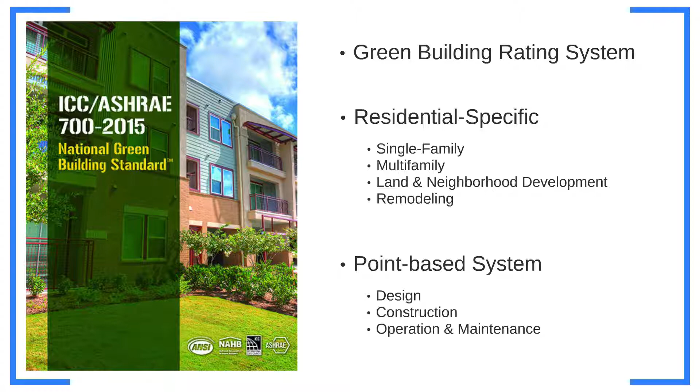The standard is a point-based system where a project can attain points and certification depending on the sustainable and green practices included in its design and construction, as well as planned for its operation and maintenance. Remodeling of existing homes and functional areas will not be reviewed in this presentation. Please reference the presentation titled Remodeling to the Standard for more information about certifying a remodeling project.

Site and neighborhood development projects can qualify for 4 increasing levels of certification, ranging from 1 to 4 stars, by earning the required number of points for each level. Similarly, single-family and multifamily homes can also earn 4 levels of certification, ranging from bronze to emerald.

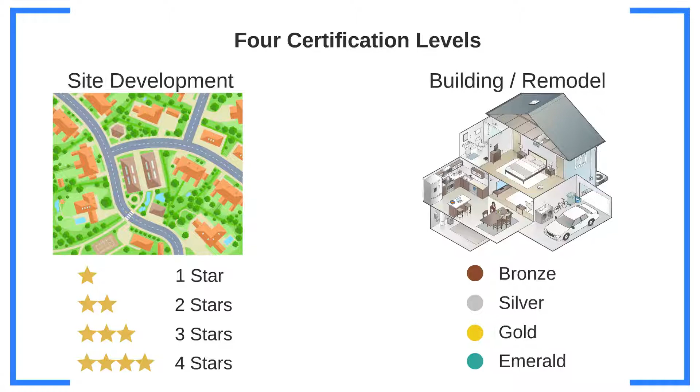Given the growth in green home building, it is critical that any residential green building standard utilized by builders across the country remains up to date with the latest technology, practices, and codes. The 2015 version of the standard is its 3rd iteration and builds upon the previous 2012 and 2008 editions. Each edition of the standard was developed by a consensus committee of industry experts, facilitated by the International Code Council and the National Association of Home Builders.

With this newest edition of the standard, the American Society of Heating, Refrigerating, and Air Conditioning Engineers, or ASHRAE, has joined in the development process, with a new formal citation becoming ICC ASHRAE 700 2015 National Green Building Standard. The standard carries ANSI approval as an American national standard, maintaining a consensus-based development and ensuring a balanced and well-rounded residential green building program.

The consensus committee that developed the 2015 version of the standard was comprised of 42 individuals representing a variety of government agencies, municipalities, industry stakeholders, and nonprofit organizations, including Habitat for Humanity International, the U.S. Department of Energy, the U.S. Department of Housing and Urban Development, and the American Institute of Architects.

The remaining 6 categories listed, from lot design, preparation, and development to operation, maintenance, and building owner education, are all focused on single-family and multifamily buildings. All of these 6 categories must be addressed in order for a building to achieve any level of certification. In fact, a building must meet the minimum point requirements for every category in order to earn certification.

For example, if a project is seeking gold certification, it must achieve the minimum number of points required for each category. It must also achieve at least 100 additional points on top of that, which it can earn from any category in order to have the final point total needed for certification. If a project does not meet the minimum number of points needed in every category, it cannot earn that level of certification. This is true even if the project has earned more points than needed in some categories.

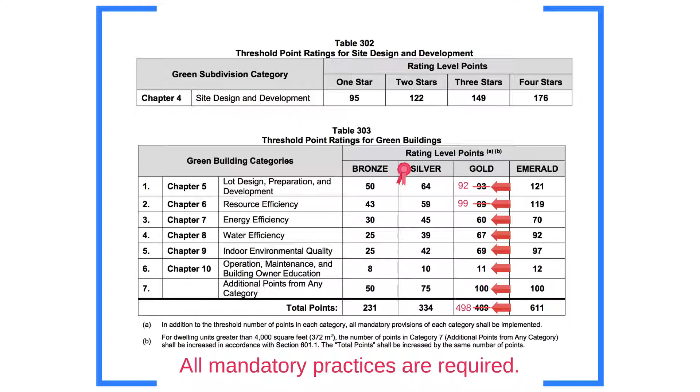This requirement makes the standard both a balanced and rigorous green building rating system and does not allow projects to earn certification if they do not address all aspects of green building. A project team must keep in mind that there are also a number of mandatory practices throughout the standard which do not earn any points. These must also be achieved for any project pursuing certification.

So let's take a quick look into each category. The Site Design and Development category, where a neighborhood can earn its own certification, focuses on minimizing the environmental impact of development, protecting and restoring natural features, and encouraging pedestrian activity in the area. Some of the practices available include clustering lots, buildings, and infrastructure, developing mixed-use areas, increasing density of residential units, and selecting high-priority sites, such as brownfields, greyfields, and infills.

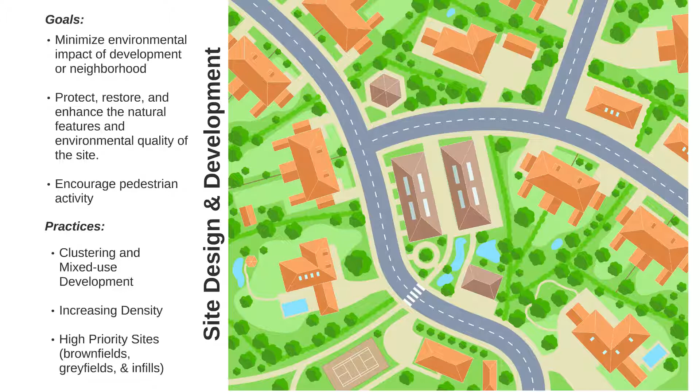Stormwater management practices are integral to the sustainability of a site. The standard recognizes and awards a number of stormwater management strategies, such as integrating increasing amounts of permeable surfacing into a community, which helps reduce runoff and increases opportunities for infiltration. Constructed wetlands and other natural innovative wastewater or stormwater treatment technologies are an excellent way to both manage and treat water on site, as well as earn points towards certification.

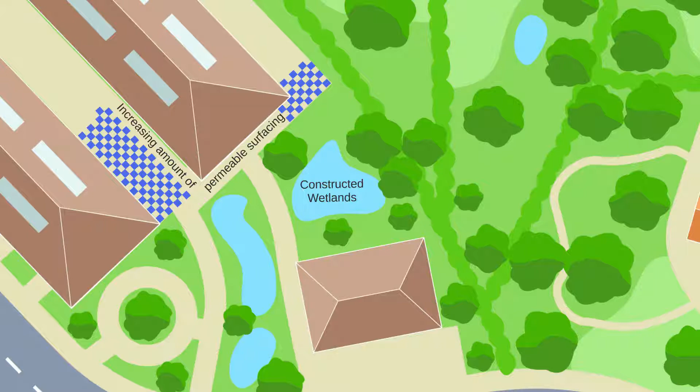Points can also be achieved if the stormwater management system is designed so that runoff rates, volumes, and durations are no greater than that of the pre-development, stable, and natural condition of the site. A hydrologic analysis is required for verification.

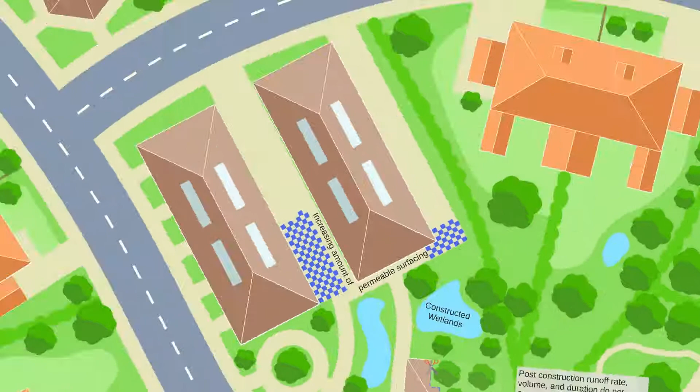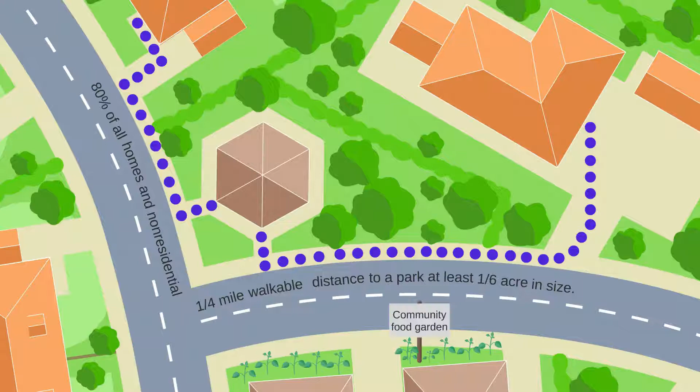The standard encourages increased community activity within the development as well. Points are available to neighborhoods if 80% of all homes and non-residential buildings are within 1/4 of a mile walking distance to a park or common area that is at least 1/6 of an acre in size. Projects can also earn points if a community food garden is established and open to all residents.

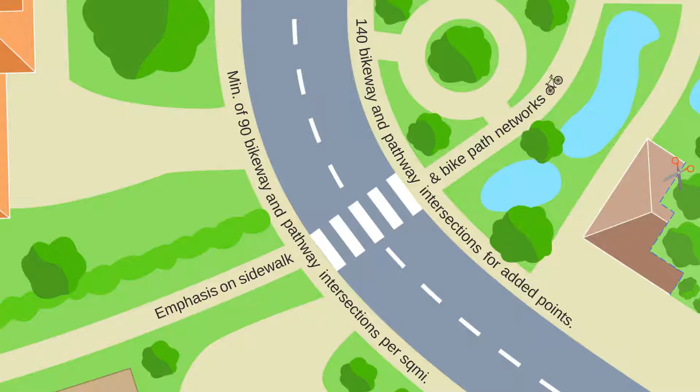Multimodal and alternative transportation is also encouraged, including networks of sidewalks and bike paths. A minimum of 90 bikeway and pathway intersections per square mile are needed to earn any points for community connectivity, and additional points can be earned if intersections are increased to 140 per square mile. Points can also be earned if all lots within the site are located within 1/2 mile walking distance to mass transit. By integrating some of these strategies, as well as many others established in the standard, a neighborhood can reduce its environmental impact, increase pedestrian activity, and differentiate itself among other communities in the area.

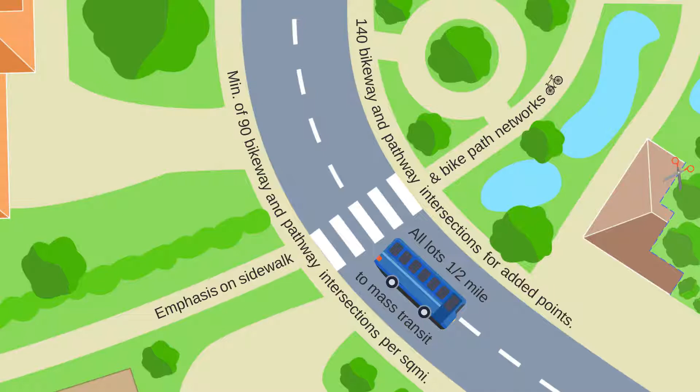Next, we will begin looking at the 6 green practice categories required for an individual home to earn certification, beginning with lot design, preparation, and development. This category is similar to the previous one, but on a smaller scale, with the goals of reducing environmental impact and protecting, restoring, and enhancing natural features. It is focused on exterior elements of the building, such as lot design and construction, stormwater management, landscaping, wildlife habitat protection, and heat island mitigation.

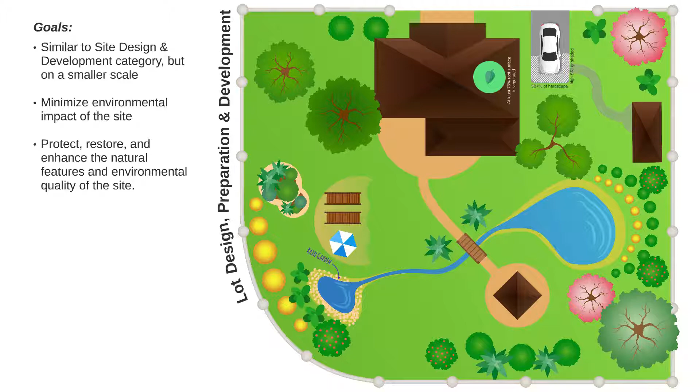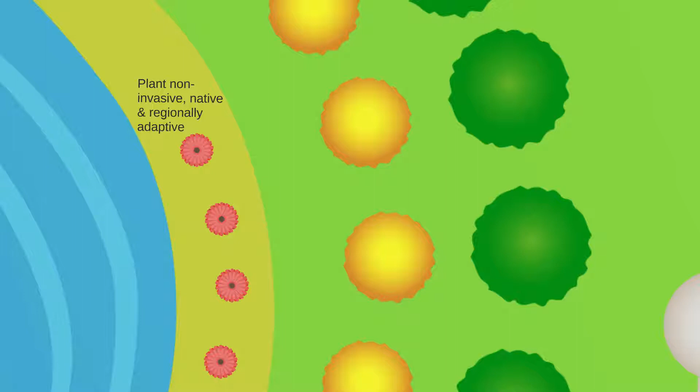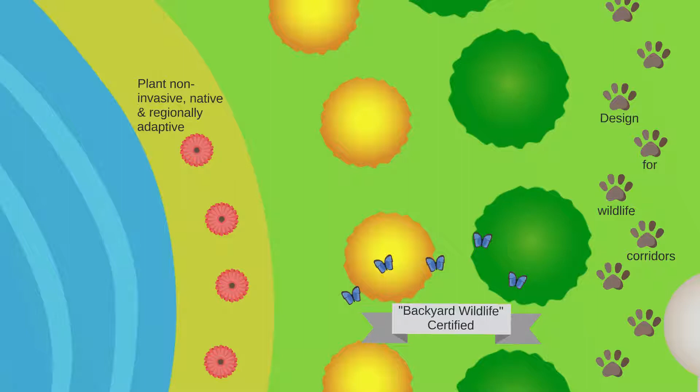Points can be earned for such practices as planting native and regionally adaptive species, which do not negatively affect existing ecosystems and require less irrigation, if any. The standard also awards homes that implement measures that support wildlife habitats, such as having a certified backyard wildlife program, as well as designing in regard for possible wildlife corridors. Recognizing the importance of pollinators to the environment, the standard also encourages the planting or improving of pollinator habitats that make up at least 10% of the vegetated areas of the site.

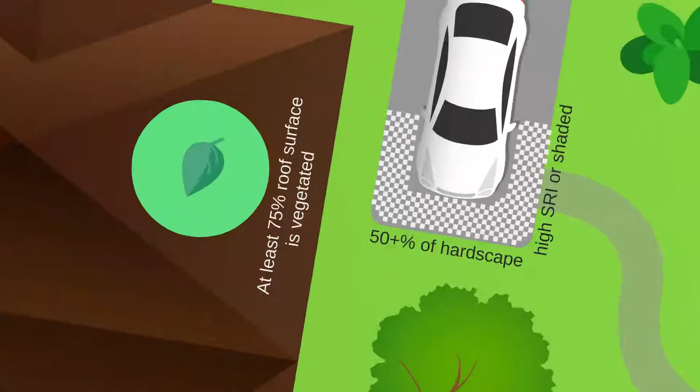Also within this category, project teams can earn points for mitigating the heat island effect experienced on their lot. There are multiple strategies available, such as having a minimum of 50% of all impervious hardscape have either high solar reflectance index or be shaded. For the home itself, points can be earned if 75% of the roof is vegetated.

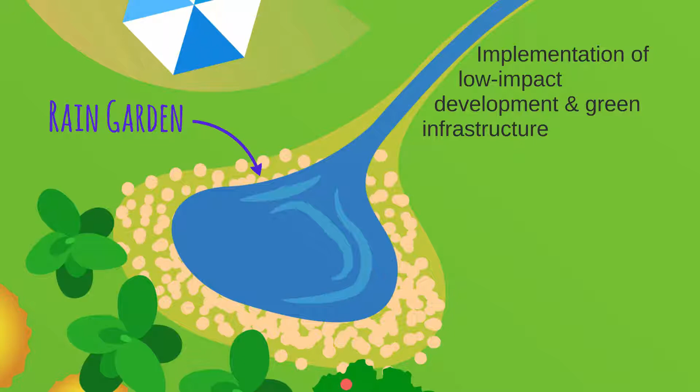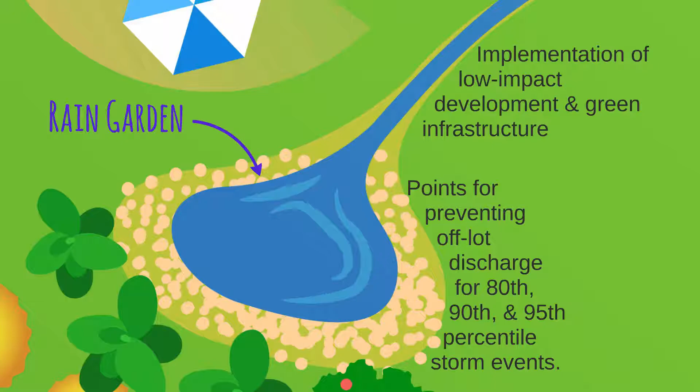Implementing low-impact development and green infrastructure, like rain gardens and bioswales, is a great strategy to reduce environmental impact further by promoting infiltration and evapotranspiration. Point values are based on the ability for LID structures to manage all rainfall on the entire site and prevent off-lot discharge for the 80th, 90th, and 95th percentile storm events.

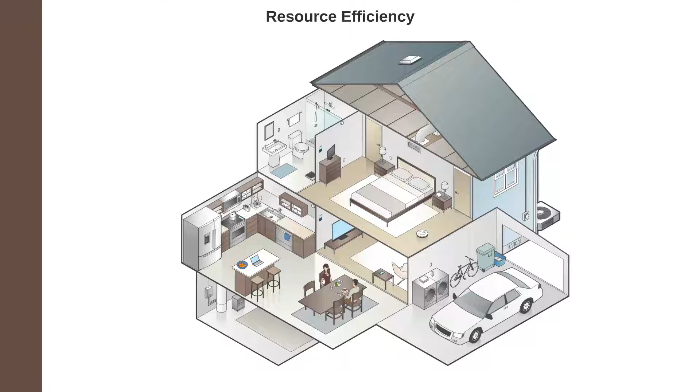Next, we will move on to the resource efficiency category. This is the second green practice category involved in the certification of a residential building. It is focused on minimizing the environmental impact of building materials, incorporating environmentally efficient building systems, and reducing waste generated during construction. This includes products and systems with enhanced durability and reduced maintenance, as well as reused, recycled, regional, or salvaged materials.

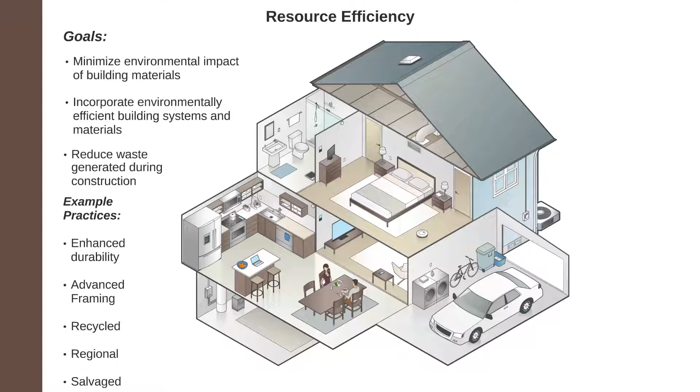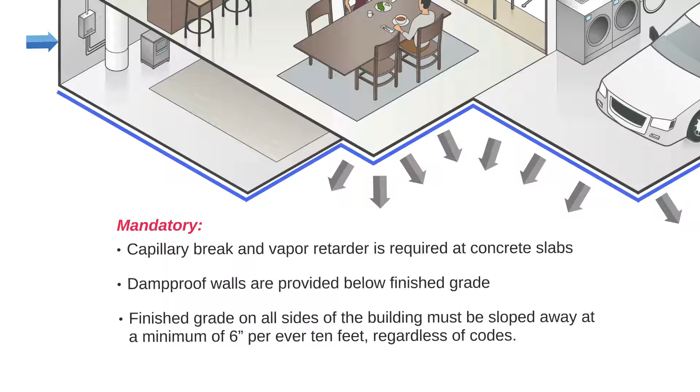A number of mandatory practices in this category focus on building to a higher standard to ensure the longevity of materials and limiting resource-intensive replacement in the future. For example, a capillary break and vapor retarder is required at concrete slabs. Damp-proof walls are provided below finished grade, and finished grade on all sides of the building must be sloped away at a minimum of 6 inches per every 10 feet, regardless of lesser codes.

Flashing is required to minimize water entry into wall and roof assemblies at numerous locations such as exterior fenestrations, built-in roof gutters, under copings and sills, and at roof-to-wall intersections, among others.

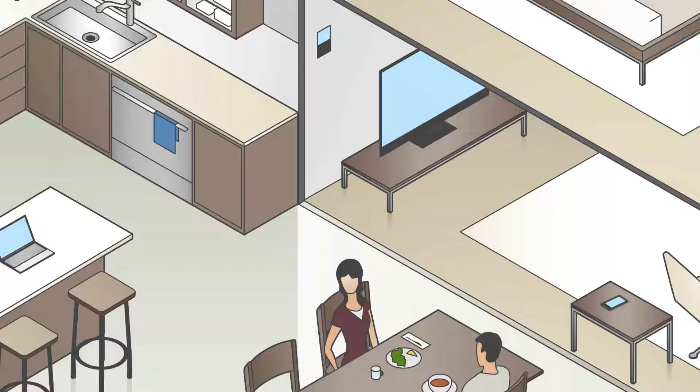Joining practices already recognized by the standard, such as performing life cycle assessments and using recycled and regional materials, the new 2015 version of the standard now also recognizes both product-specific and industry-wide environmental product declarations, or EPDs, for building materials. Product-specific EPDs are weighted higher than industry-wide EPDs. To begin earning points, at least 10 building products must have EPDs.

Next, we will review the energy efficiency category, which is focused on reducing the energy consumption of the home, as well as promoting use of renewable energy sources.

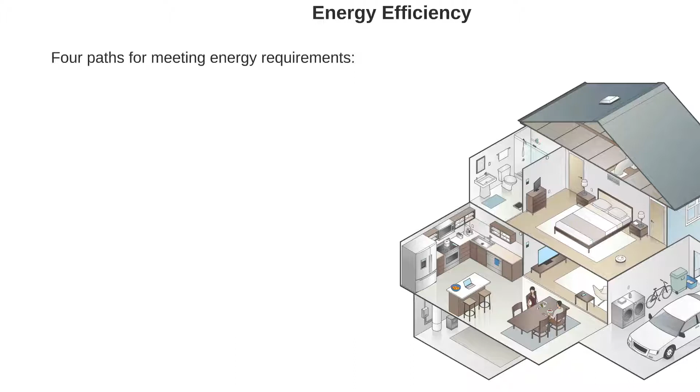There are 4 pathways a building may take to comply with this category. The performance path, based on energy modeling, requires that a building must meet or surpass the baseline performance in IECC 2015, the latest version of the International Energy Conservation Code.

If a project is seeking Emerald certification, the highest level, it must complete the performance path and cannot select any of the other remaining options.

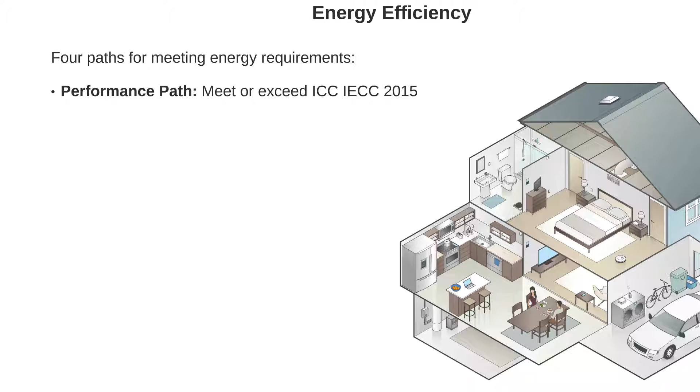Projects not seeking Emerald certification have the option to choose the prescriptive path, which requires a building to earn a minimum of 30 points by selecting and implementing energy conservation measures listed in the standard. The prescriptive path also has a number of mandatory requirements, such as complying with insulation and fenestration requirements within the 2015 IECC, as well as duct system testing requirements.

New to the 2015 version of the standard, a home now has the option to utilize the HERS index to comply with this category, based on the EPA HERS Index Target Procedure.

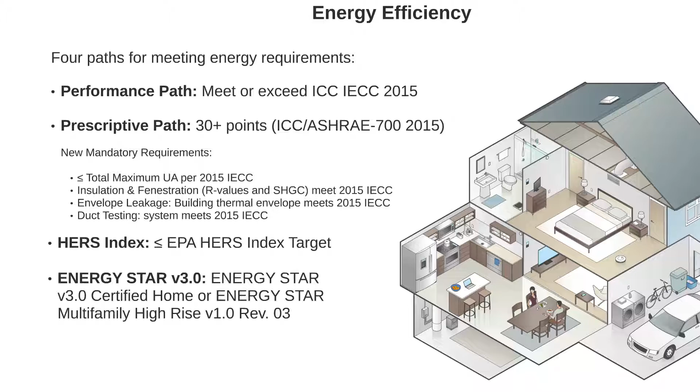Finally, an ENERGY STAR version 3 certified home or version 1 revision 3 certified multifamily high-rise complies with the minimum requirements. However, by selecting this path, the project cannot earn gold or emerald certifications. An ENERGY STAR home can only earn bronze certification, and an ENERGY STAR multifamily high-rise can only achieve silver.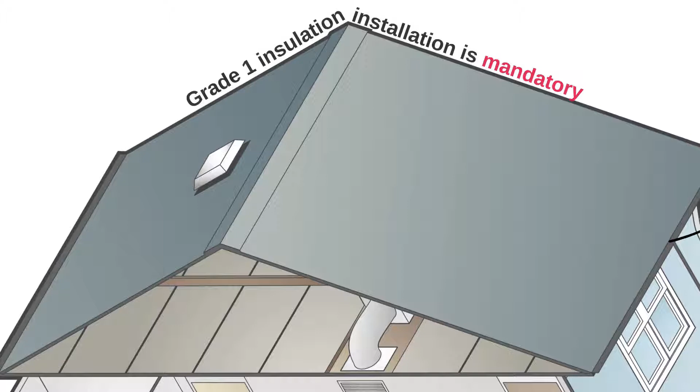A major update to the new version of the standard is the mandatory requirement that all projects have insulation installed to Grade 1 standards. Grade 1 is the highest standard of installation and applies to all insulation in the home, from floor to ceiling. With Grade 1, there are no substantial gaps or voids in the insulation, and cavities are uniformly and completely filled. When dealing with wiring and other services, cavity insulation should be either split or fitted tightly around the wiring.

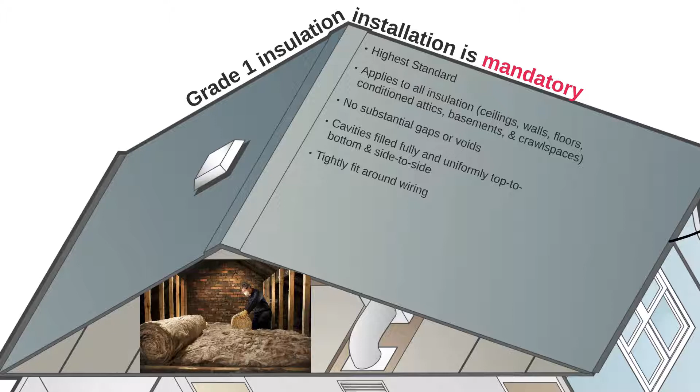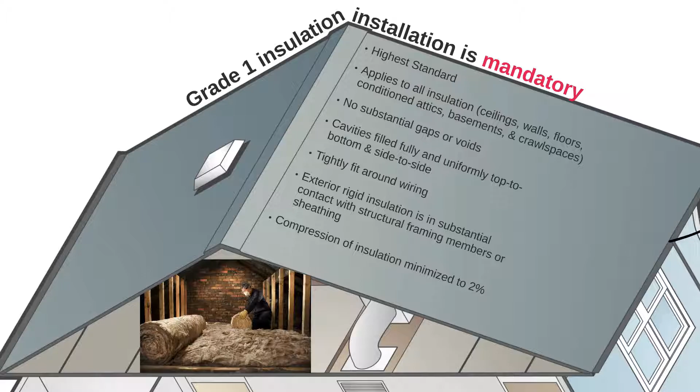Any exterior insulation must be in substantial contact with the framing or sheathing, and compression of any insulation is minimized to 2% or less. This must all be verified by an independent third party before drywall can be installed.

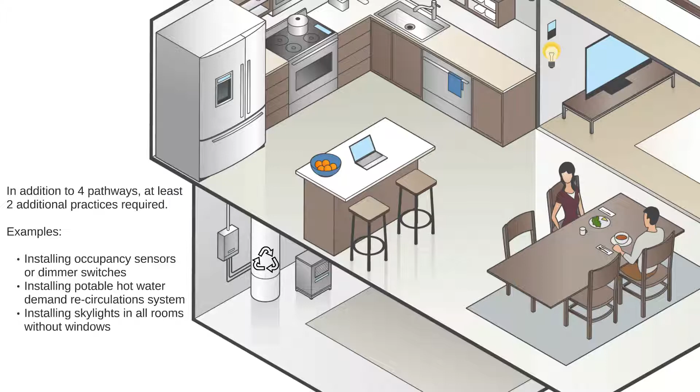In addition to achieving one of the 4 pathways, such as energy modeling or HERS, a project must also select at least 2 additional practices from a list in the standard. Examples of additional practices include installing occupancy sensors or dimmer switches on lighting, installing a potable hot water demand recirculation system, or installing skylights or tubular daylighting devices in all rooms that don't have windows.

In the new version of the standard, points can now be earned for installing an automatic demand response system that curtails energy use upon a signal from the utility and energy service provider.

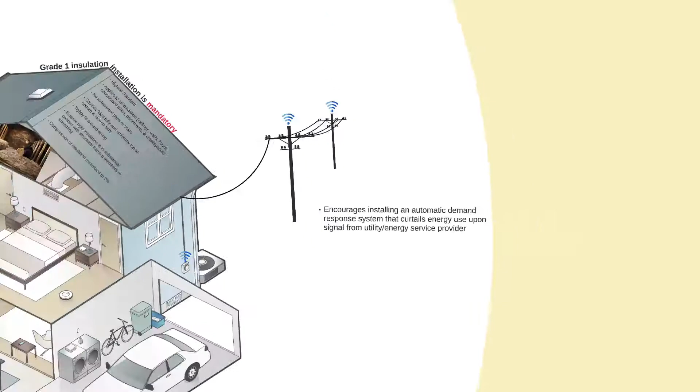Next, we will shift from efficiency in energy to efficiency in water use.

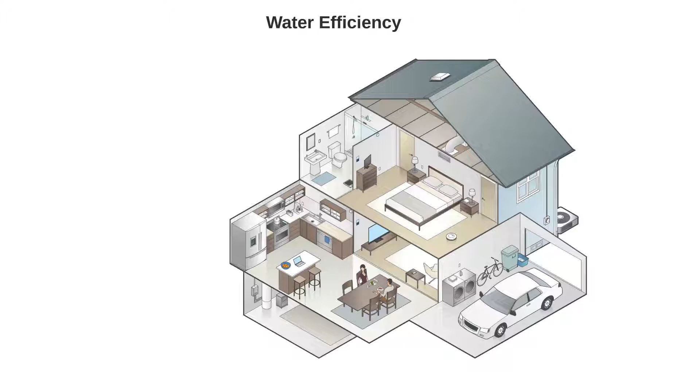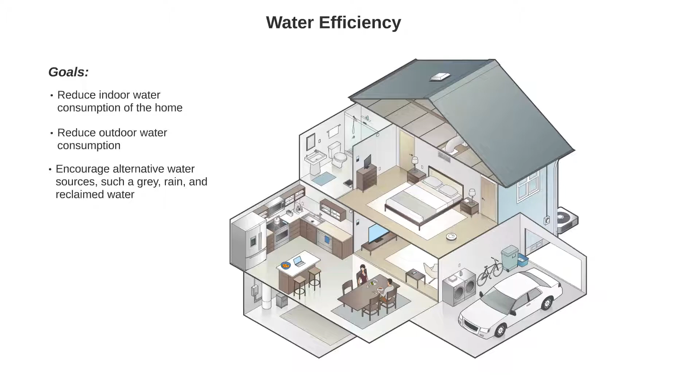The water efficiency category has the goals of reducing the overall water usage of the home, focusing both on indoor and outdoor water use. Not only are water reduction strategies provided, but the standard also encourages the capture and reuse of initially non-potable water, such as gray water and rainwater on site.

Inside the home, a project can earn points for minimizing the total volume of water from the water heater to the furthest fixture, not exceeding 1 gallon, and earning more points by reducing down to 1/4 of a gallon. Utilizing tankless water heaters is also recognized by the standard, as long as the water heater can ramp up to 110 degrees Fahrenheit within 5 seconds.

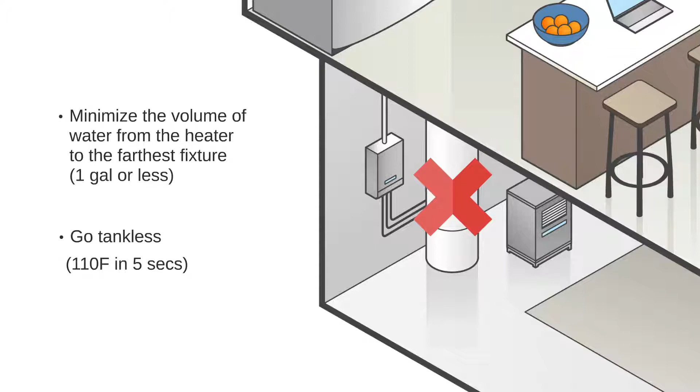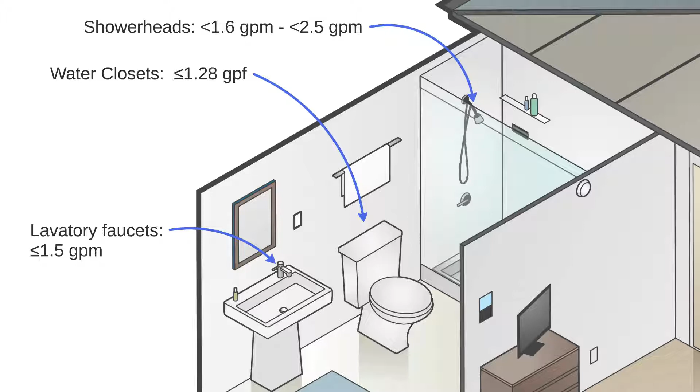Water-efficient lavatory faucets, shower heads, and water closets can all earn an increasing number of points depending on their flow rates. Added points can be earned by using waterless or composting toilets.

Energy Star appliances, such as washing machines, are an excellent way to reduce water consumption and can earn extra points if they have a water factor of 4 or less.

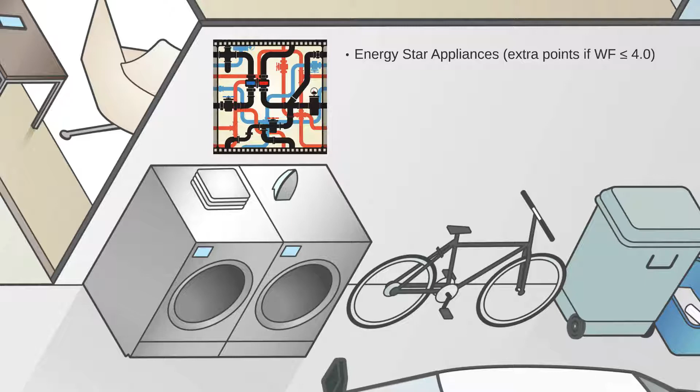As for water sources, previous versions of the standard awarded points for a home that utilized reclaimed, gray, or recycled water, but a number of municipalities have limitations or restrictions on the use of these water sources inside the home. While the standard still awards points for use of alternative water sources, it also now awards some points for projects that rough plumb these systems into the building for future use.

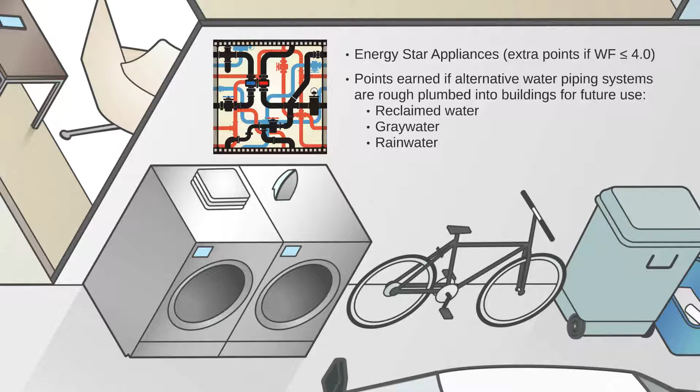This will allow homes to be ready should the owner and municipality move towards alternative water sources. All piping must be permanently marked, tagged, or labeled appropriately.

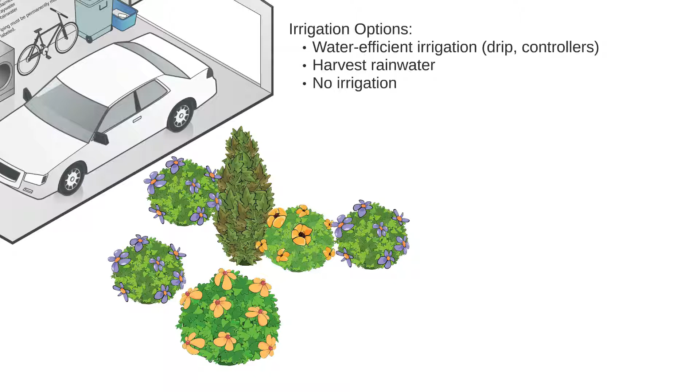Outside of the home, points can be earned for using water-efficient irrigation systems, harvesting rainwater for irrigation purposes, or by having landscaping where no irrigation is needed.

If irrigation is installed, the standard requires that all irrigation plans and implementation must be executed by a qualified professional certified by a WaterSense labeled program or equivalent.

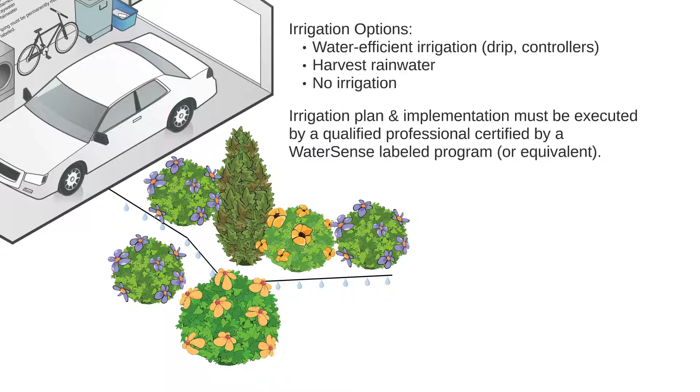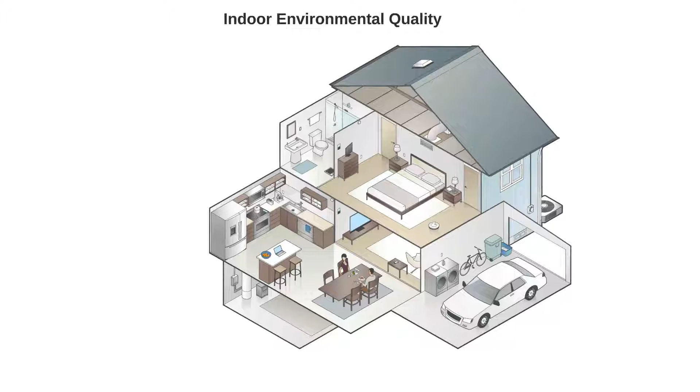Beyond efficiencies, a major aspect of green building and sustainability is air quality and the indoor environment of the home. The goal of the Indoor Environmental Quality, or IEQ, category is to reduce the possible pollutants inside the walls of the home that originate from a variety of sources.

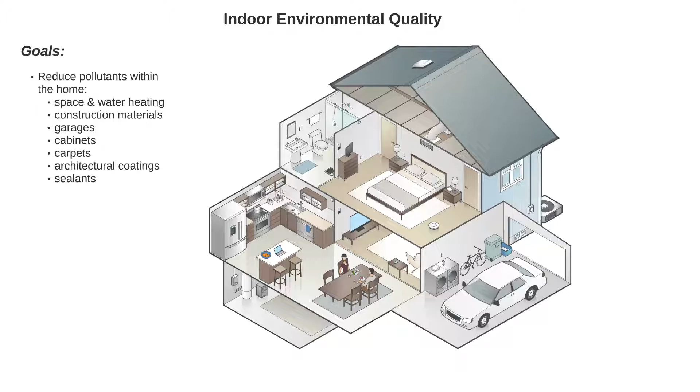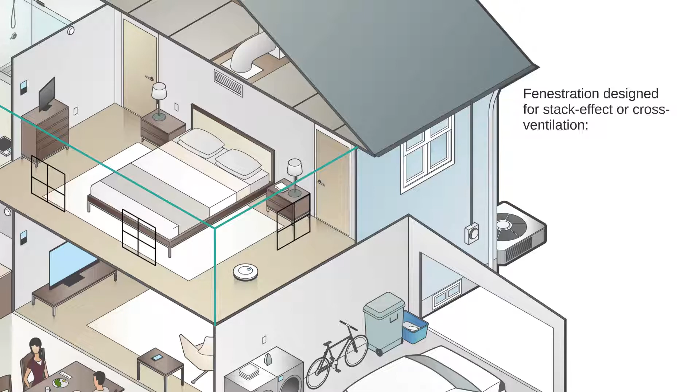Among many other strategies, the standard awards points for designing the home and fenestration to achieve stack effect or cross ventilation, bringing outdoor air into and through the home. At a minimum, the standard requires at least 2 openings in a space on opposite or adjacent walls. All openings must be operable, such as windows or skylights, and all openings must have insect screens. The total area of the openings must be at least 15% of the floor area of the space.

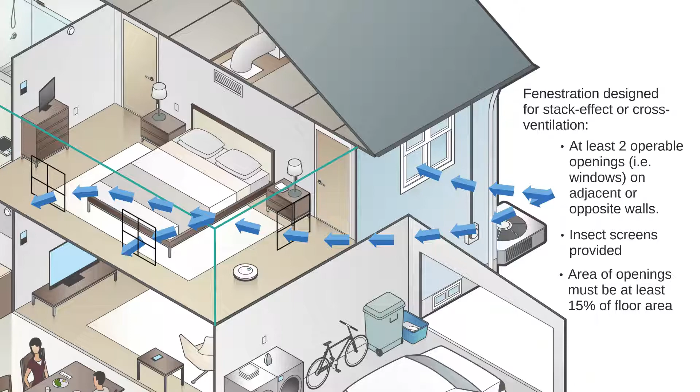When it comes to mechanical systems, projects can earn points for having MERV 8 to 13 filters, and earn an added point if a MERV 14 filter is installed. Verification is required that the HVAC system can accommodate the greater pressure drop of this type of filter.

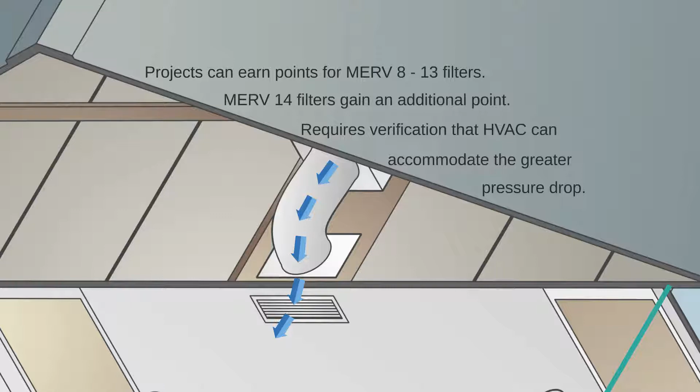Using zero VOC, low VOC, or green seal products for architectural coatings, adhesives, and sealants can also earn a project points, as well as installing insulation that meets emission standards, measured in a laboratory and certified by a third-party program accredited to ISO 17065.

The standard has also added the practice of implementing indoor air quality control measures throughout construction, such as keeping materials dry and ensuring emission requirements are met. Additional points can be earned if post-construction verification of the quality of indoor air is completed.

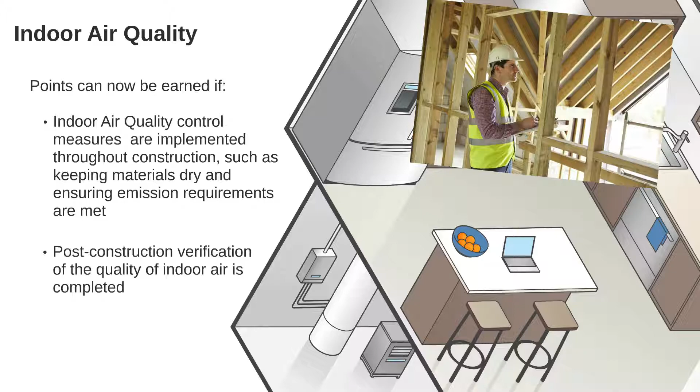The final category involved in the certification of a home is operation, maintenance, and building owner education. This category is essential to the long-term sustainability and optimization of a home, as the resident's behavior is a key part of keeping the home running efficiently.

The standard requires first-hand training of the initial building or homeowner, ensuring the occupant has the necessary education to operate their home and its systems correctly and efficiently. This includes items such as HVAC filter maintenance, thermostat programming, and even recycling and composting practices.

A homeowner's manual is also mandatory and must include the National Green Building Standard Certificate with completion documentation, a list of green building features, as well as all product manufacturers' manuals and product data sheets for major equipment, fixtures, and appliances installed in the home.

Project teams can earn additional points for adding items like local transportation options available around the home, information on renewable energy utility providers, and information on green cleaning.

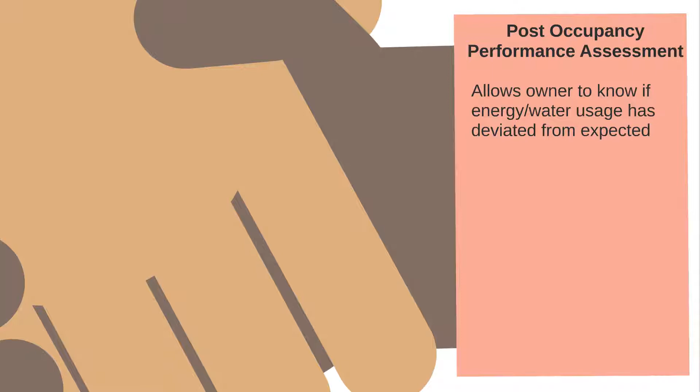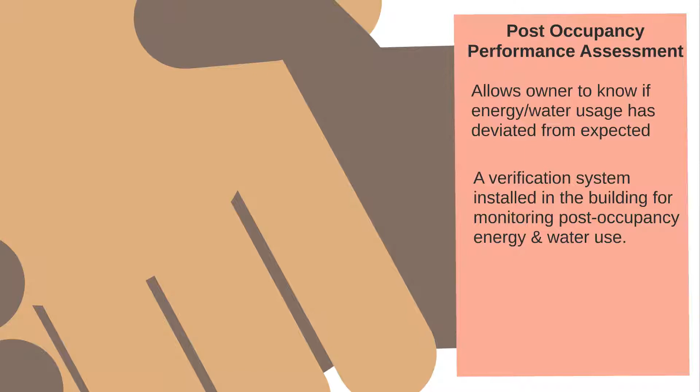Post-occupancy performance assessments are also encouraged, allowing for owners to determine if any energy or water usage has deviated from expected levels, and if any necessary inspections or corrections should be made. A building verification system to monitor energy and water use can be used to measure consumption the first year of occupancy and then compare it to annualized consumption at least every 4 years moving forward.

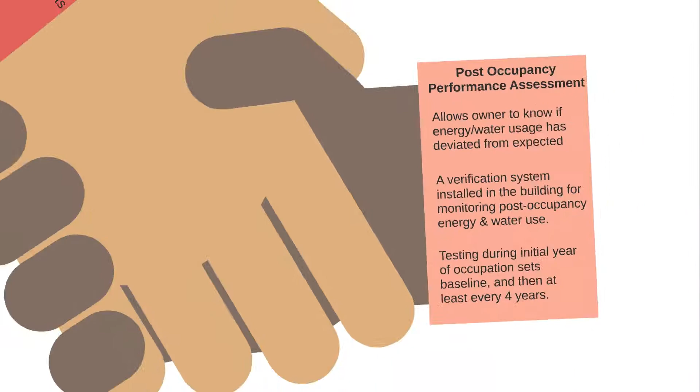So now that we've been familiarized with the categories involved in certifying a project to the standard, let's take a look at the certification process itself.

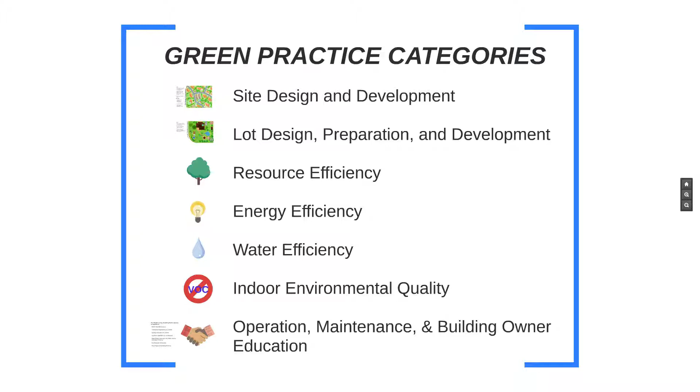All NGBS projects must include a green verifier on the project team, who serves as an independent in-field representative of the NGBS Green Certification Program. Verifiers can also assist the project team with their knowledge of the standard and should be contacted as early as possible in the design and construction process.

At the same time, the project team can complete the building scorecard to indicate all of the green building practices they are pursuing. Once the project team finishes the scorecard, the verifier will register the project with the certifying body, Home Innovation Research Labs, who will be reviewing and overseeing the certification process.

Once prepared, the project team can send the verifier all construction documents, plans, specifications, and any other information needed to ensure green practices are being implemented correctly.

Next, the verifier will complete a mandatory visual inspection of every single green building practice being pursued in every single residential unit prior to drywall being installed. This is essential to ensure practices such as Grade 1 insulation installation are being completed properly.

The team will sign the rough verification report, acknowledging they have completed it, and the verifier will provide it to Home Innovation for review, along with any other documentation needed.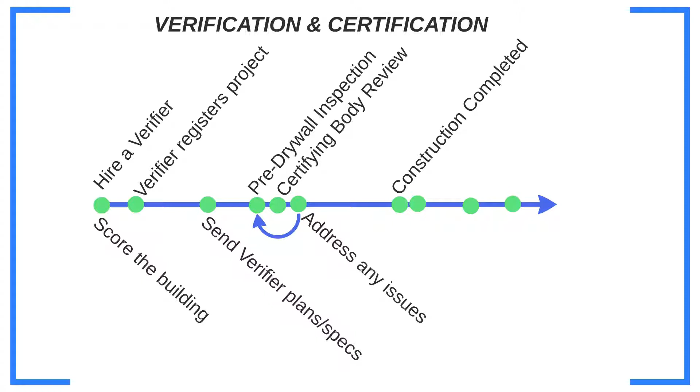Once construction is completed, the verifier will complete a final mandatory inspection of green building practices and generate a final report. Home Innovation Research Labs will review this final report and award NGBS Green Certification, provided the project has successfully achieved the required number of points.

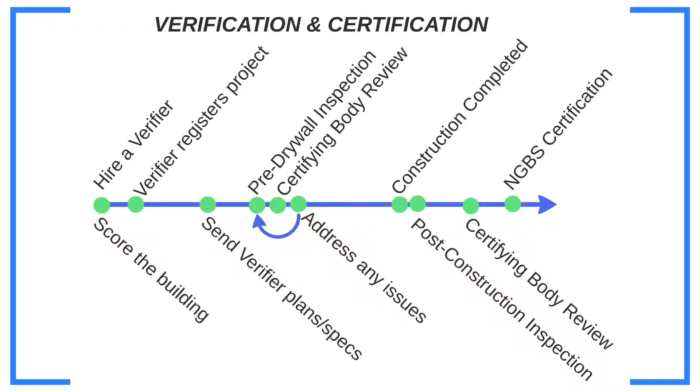The standard can be your guide to creating an efficient, healthier, and eco-friendly living space, and we hope this presentation has provided you with the tools to move forward with getting your next residential project NGBS certified. Thank you for your participation.